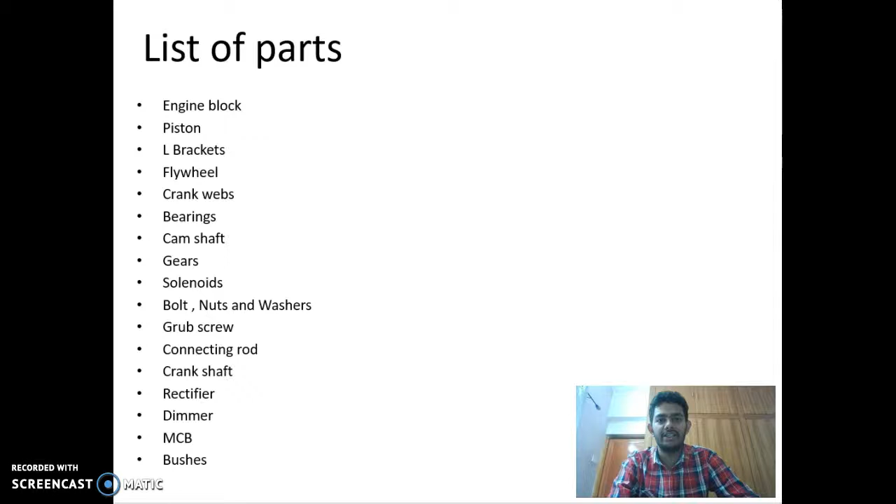power to the flywheel. These are the list of the parts which we have been using in our mini project. Engine block, piston, L brackets, flywheel, crank webs, camshaft, gears, solenoids, bolts, nuts and screws and washers, grub screws, connecting rods, dimmer, rectifier, MCB, bushes.

This is the main casing of the engine, which consists of 4 L brackets and 2 base plates on which the solenoids are mounted. The whole structure is made from mild steel. It is fixed to the wooden base with the help of bolts and nuts. The machining operations performed for the manufacturing of this engine block are grinding, drilling, polishing, etc.

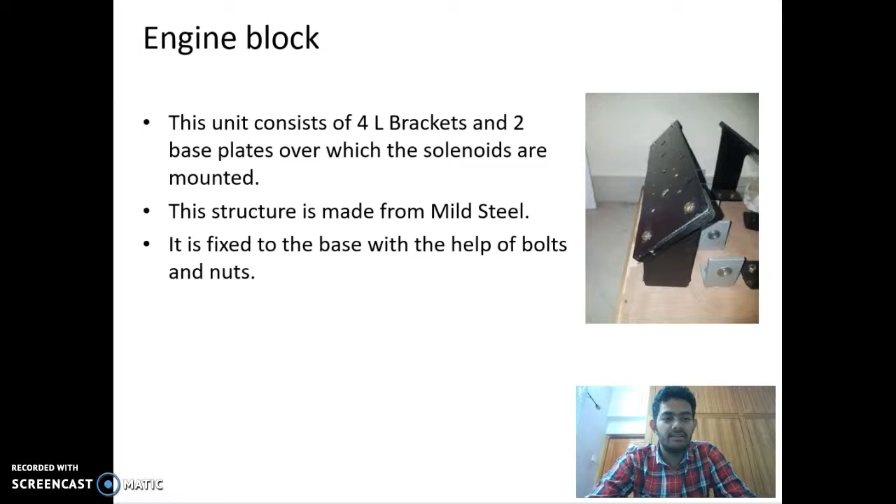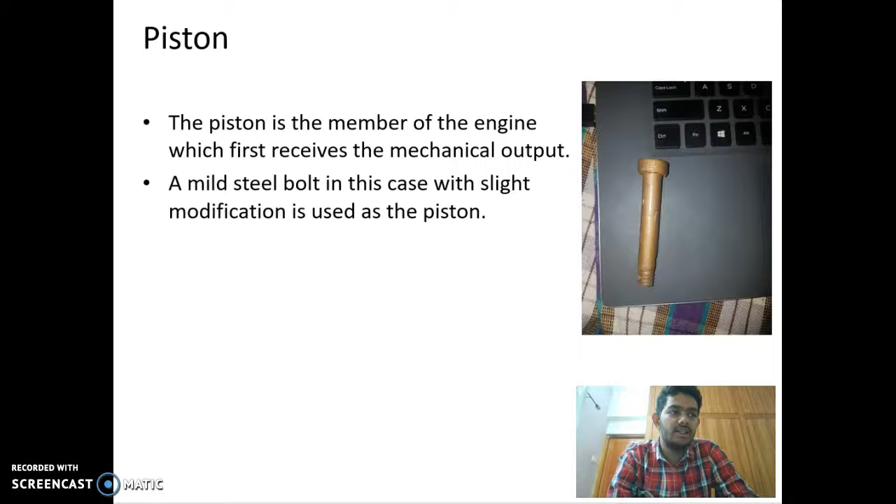This is the piston rod. The piston is a member of the engine which first receives the mechanical output. A mild steel bolt has been used with slight modification which can be used as a piston. The threading of the screw has been cut in half and a drilling operation has been performed on the threading of the bolt, which can be used for connecting connecting rods. The piston moves up and down towards the solenoid, which convert the electrical energy into the mechanical energy.

Here you can see that in the connecting rod, the two ends of the connecting rod have been drilled by a 5 mm drill, and polishing grinding has been done to the edges of the connecting rod. This connecting rod which we have used in our project is made up of a stainless steel material.

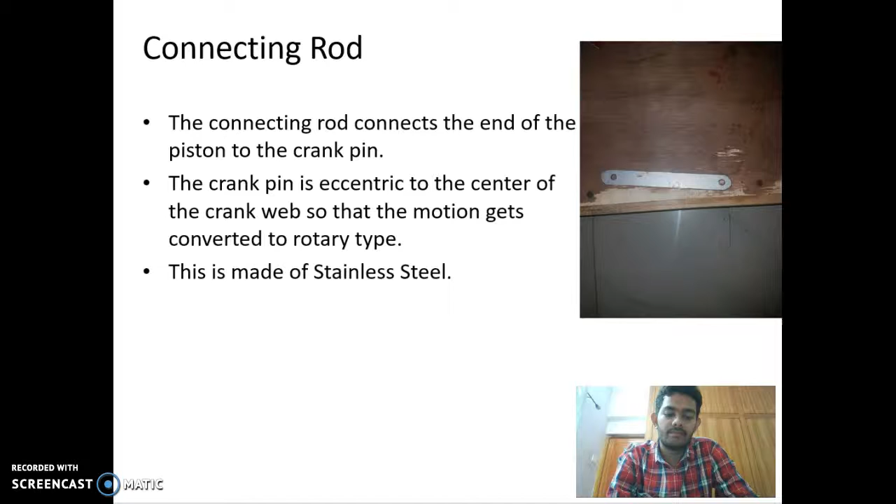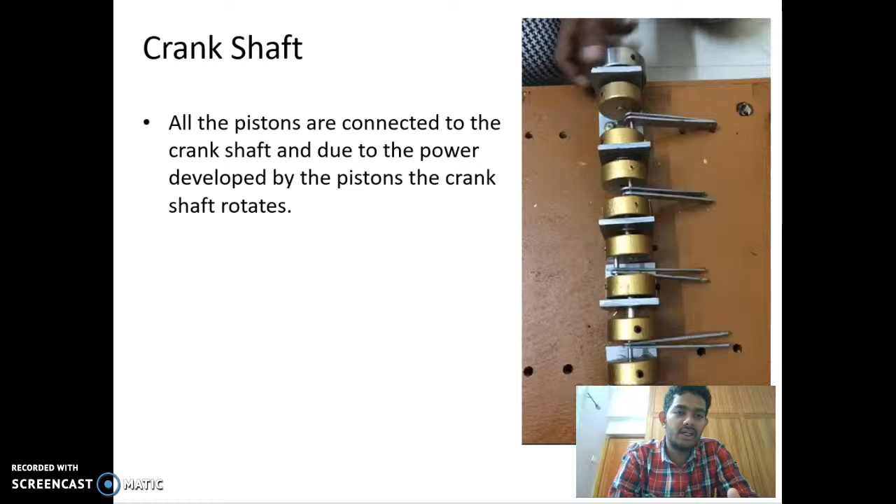The next is a crankshaft. As you can see, this is the crankshaft. All the pistons are connected to the crankshaft; due to the power developed by the pistons, the crankshaft rotates. The one at the end of the wooden base is known as a flywheel, and the golden parts are called the crank, and there is a connecting rod connected eccentrically to the diameter of the crank, and the connecting rods have been connected.

This is the flywheel. Power is obtained at the flywheel. The flywheel is present at the end of the crankshaft. This is made up of stainless steel. The machining operations that have been performed in this are turning, facing, chamfering and drilling of the base.

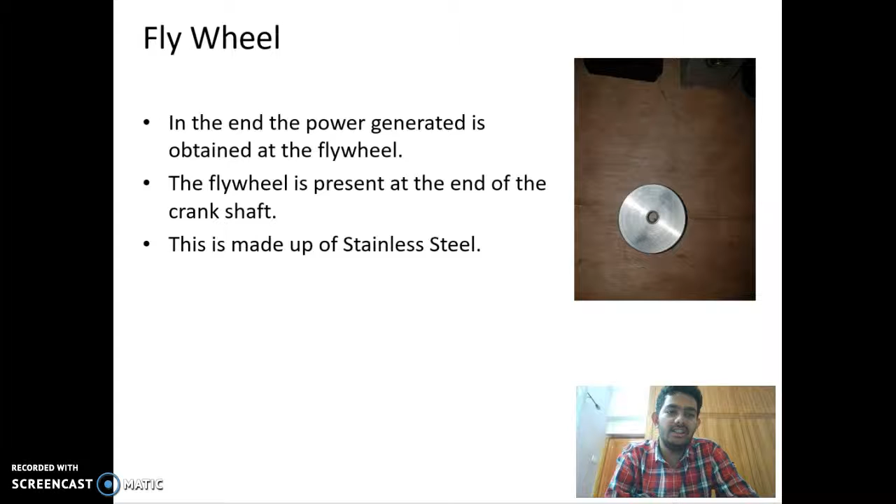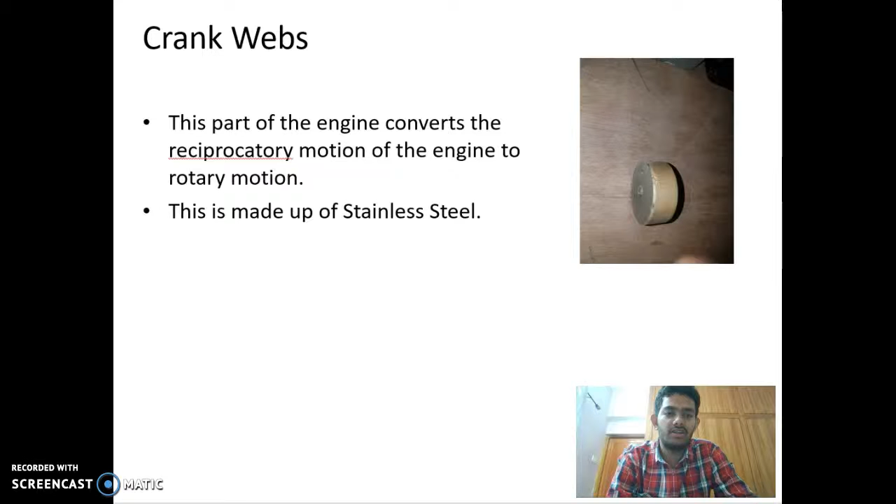This is the crank web which acts as the crank of the crankshaft. This part of the engine converts the reciprocatory motion into rotary motion. This material is made up of stainless steel. The machining processes which have been done on the surface are facing, turning, drilling and counter boring.

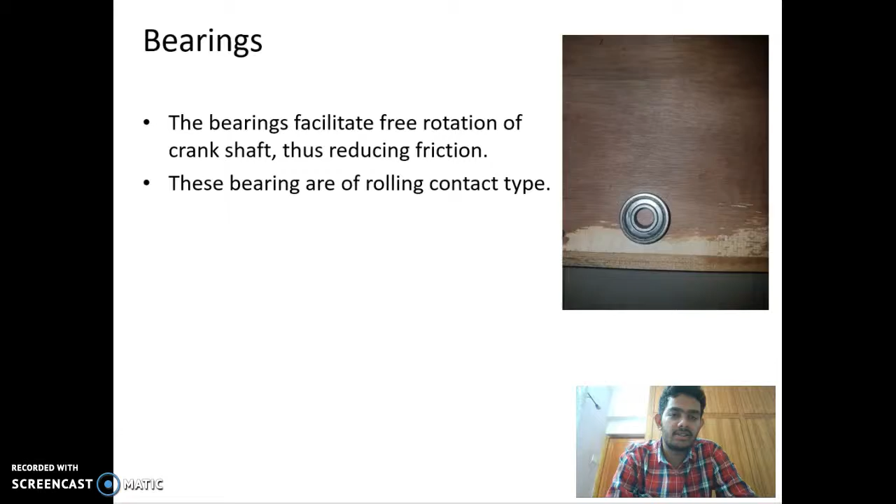These are bearings. The bearings facilitate free rotation of crankshaft, thus reducing friction. These bearings are rolling contact type bearing. They're used for the free rotation of the crankshaft. These are the L brackets. These basically provide structures which bear loads and provide elevation.

The L brackets which we have used are made of stainless steel 304 material and mild steel. These are held to the wooden base by bolting them to the base. The operations which have been performed for these L brackets are drilling and cutting using the lathe.

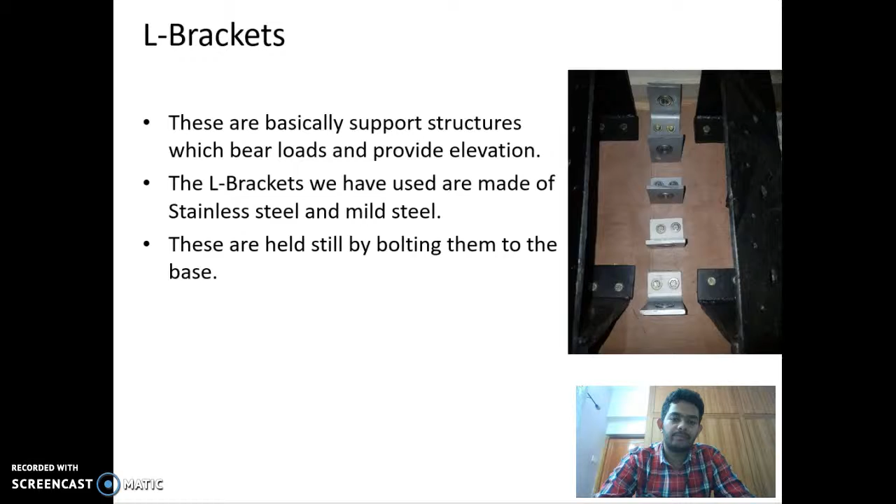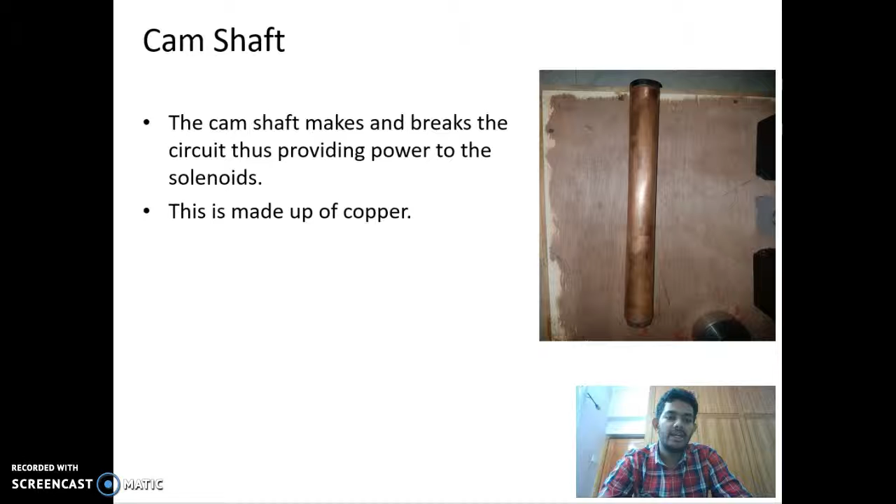This is the camshaft, which is made up of copper. The camshaft makes the circuit, breaks the circuit, thus providing power to the solenoids. When the solenoid wire comes in contact with the camshaft, power is generated for just a second and then it goes off, and this motion takes place.

Gears are used to transmit the motion of crankshaft to camshaft. The gears used here are in the 1:5 ratio. We have changed the chain gears to the spur gears, and the ratio also has been reduced.

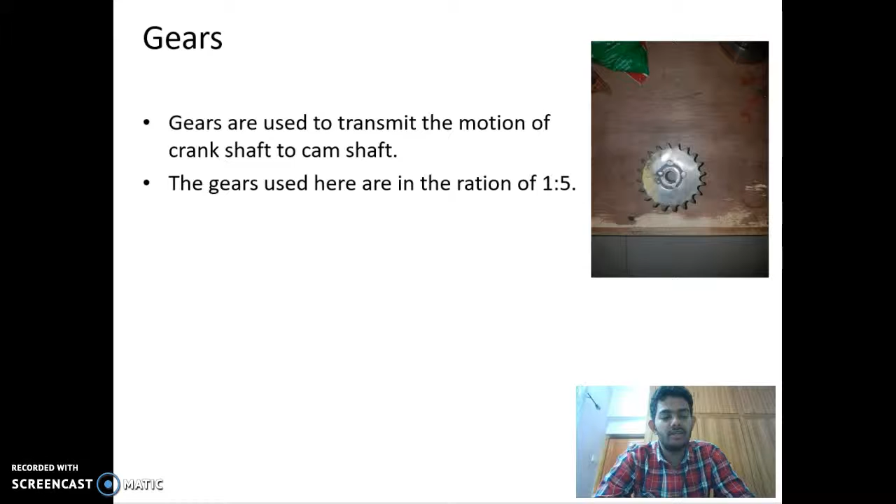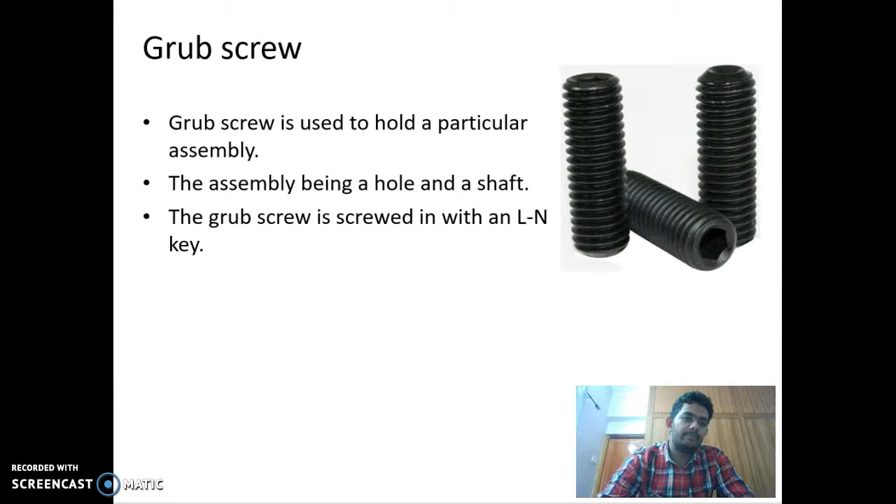These are grub screws. A grub screw is used in any assembly to hold it in particular, the assembly being a hole and a shaft. The grub screw is screwed in with an Allen key, and also can be removed, which holds the materials together. Bolts, nuts and washers can be used anywhere in the engine to fix themselves to the other parts of the engine or to the base.

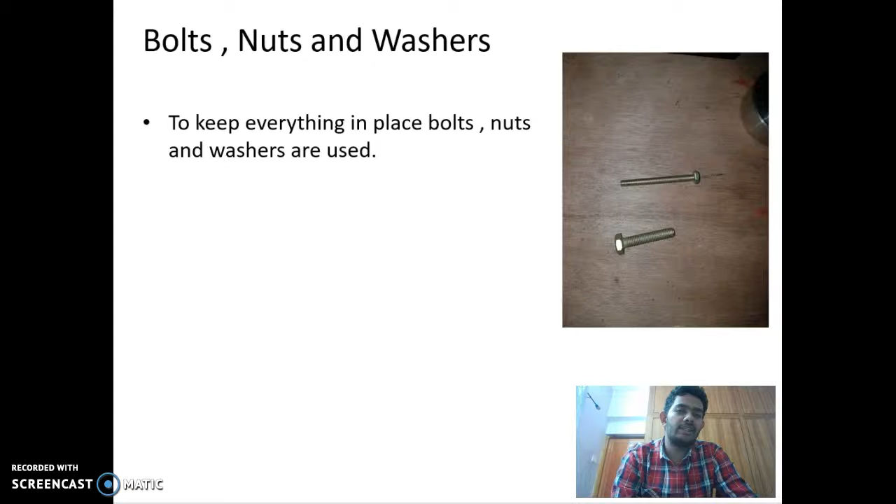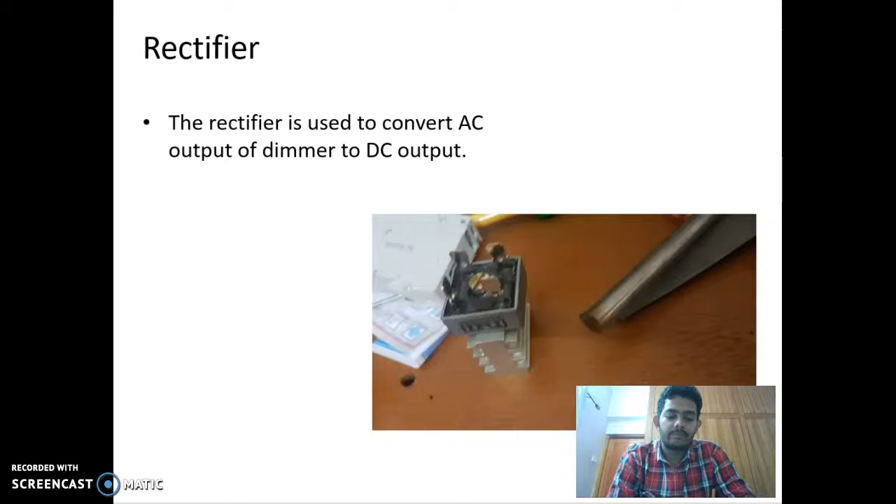That's it. This is all about our mini project, and we have yet a few other things to get back to.